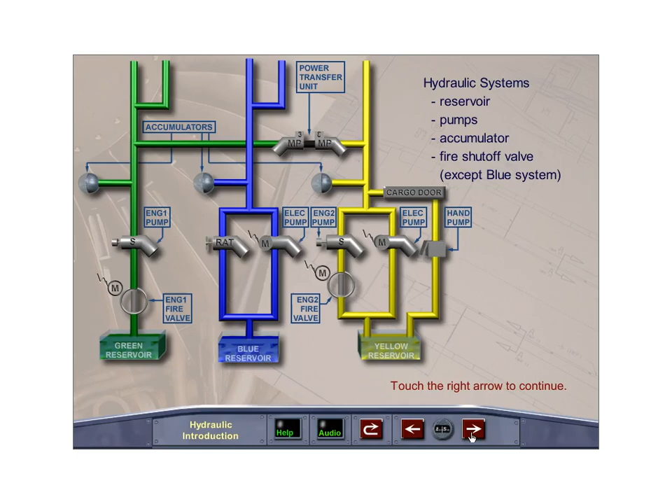The hydraulic system consists of three independent continuously operating systems: green, blue, and yellow. Each system has its own reservoir, pump or pumps, and accumulator. The green and yellow systems each have a fire shutoff valve. Hydraulic fluid cannot be transferred from one system to another. The normal system operating pressure is 3,000 psi.

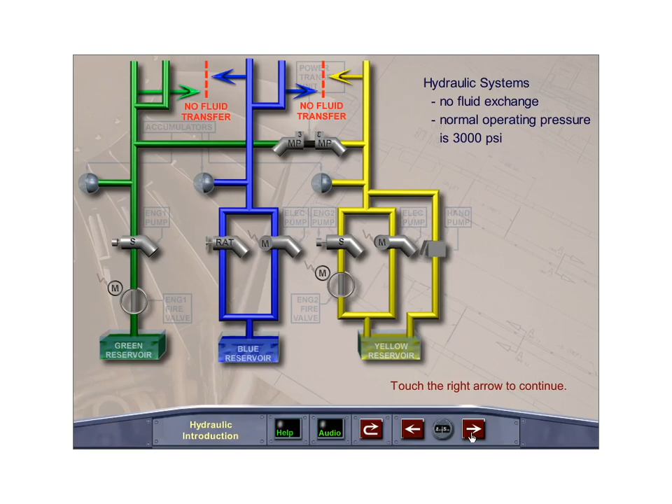The hydraulic control panel is located on the overhead panel. There are switches for the green, blue, and yellow systems. In normal operating configuration, there are no lights illuminated on the hydraulic panel.

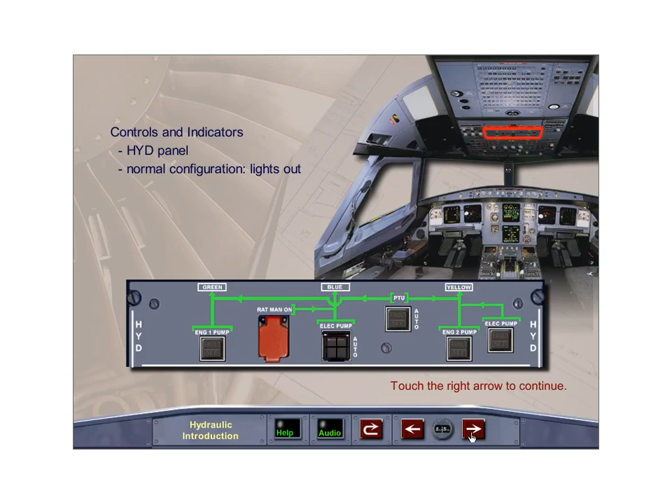Additional hydraulic push-button switches can be found on the maintenance panel. They are used only for maintenance purposes.

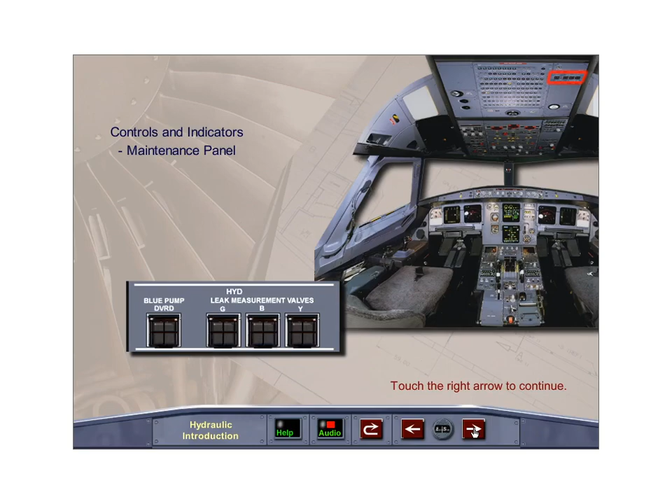The ECAM hydraulic page will be displayed automatically with any hydraulic system fault, or by pressing the hydraulic push-button switch on the ECAM control panel.

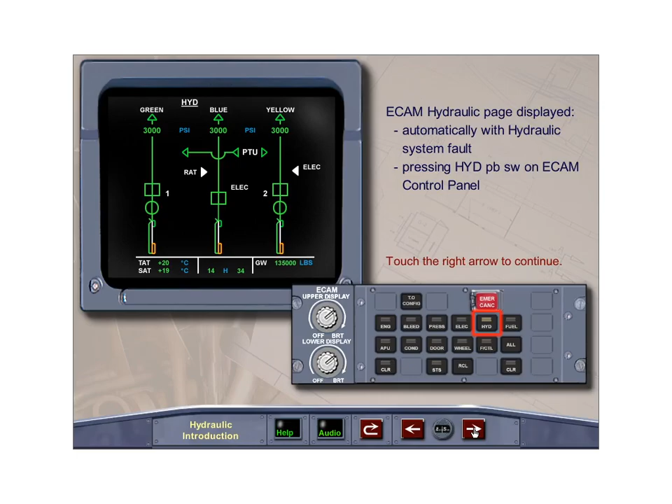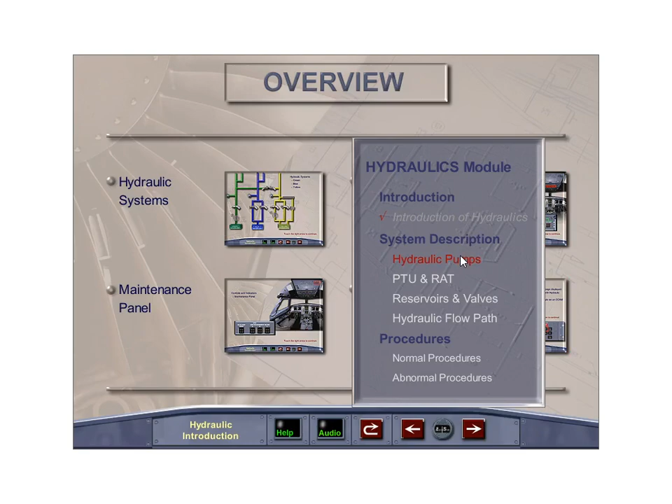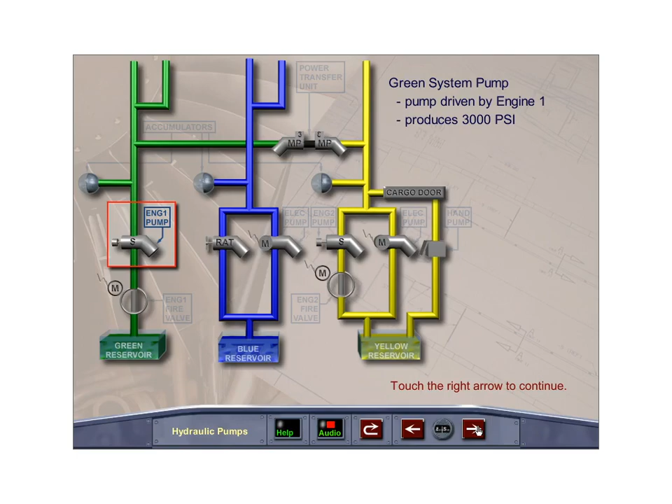A pump driven by engine 1 pressurizes the green system to a normal pressure of 3,000 pounds per square inch. An electric pump pressurizes the blue system to a normal pressure of 3,000 pounds per square inch. In case of emergency, a pump driven by the ram air turbine will pressurize the blue system to a pressure of 2,500 pounds per square inch.

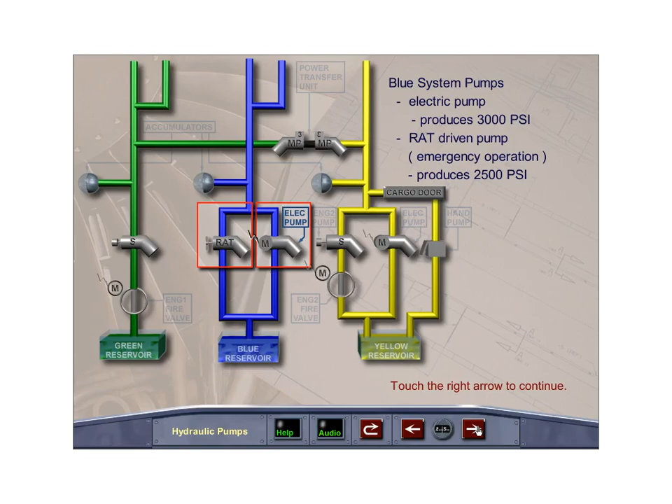A pump driven by engine 2 pressurizes the yellow system to a normal pressure of 3,000 pounds per square inch. On the ground, with the engine stopped, or in flight as a backup pump, the electric pump can pressurize the yellow system to a pressure of 3,000 psi. On the ground, with electric power not available, a hand pump can be used to pressurize the system.

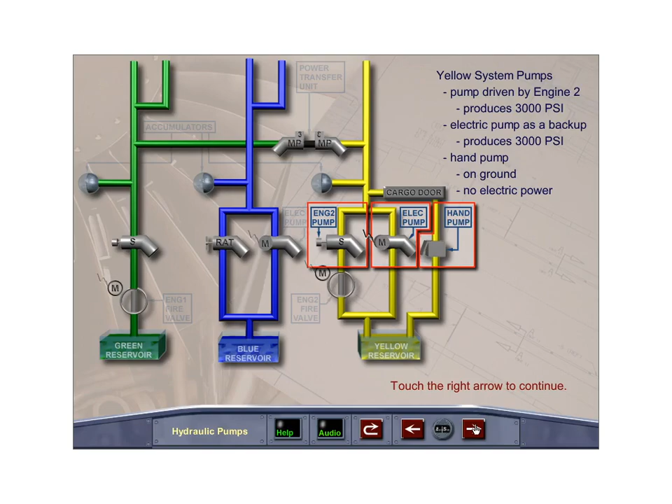The engine 1 and 2 pump push-button switches for the green and yellow hydraulic systems are located on the overhead hydraulic panel. When the engine is running and the switch is in the on or light out position, the pumps pressurize their respective hydraulic systems.

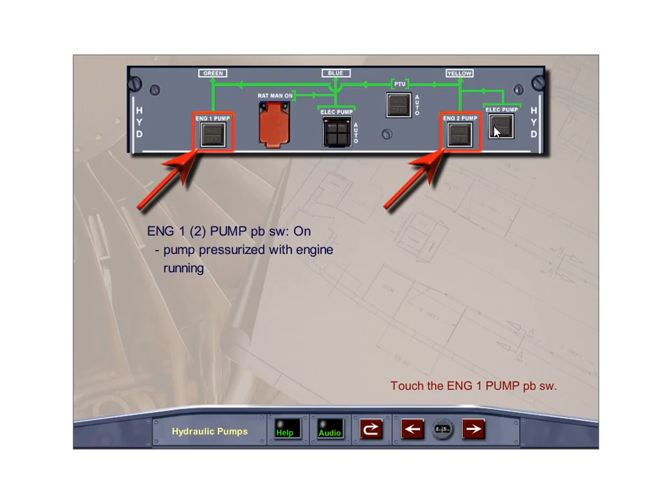Touch the engine 1 pump push-button switch to turn it off. When the engine pump push-button switch is pushed off, the pump is depressurized and the generation of hydraulic power stops.

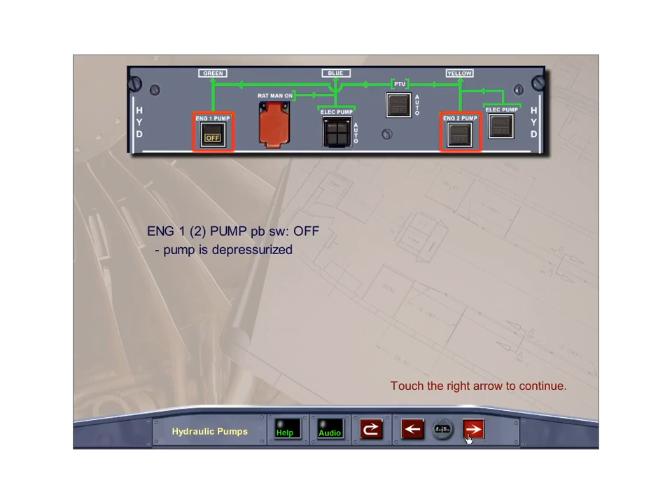The amber fault light illuminates if the reservoir level is low, the reservoir overheats, the reservoir air pressure is low, or the pump pressure is low. The fault light for pump low pressure is inhibited on the ground with the engines not running, to prevent nuisance warnings.

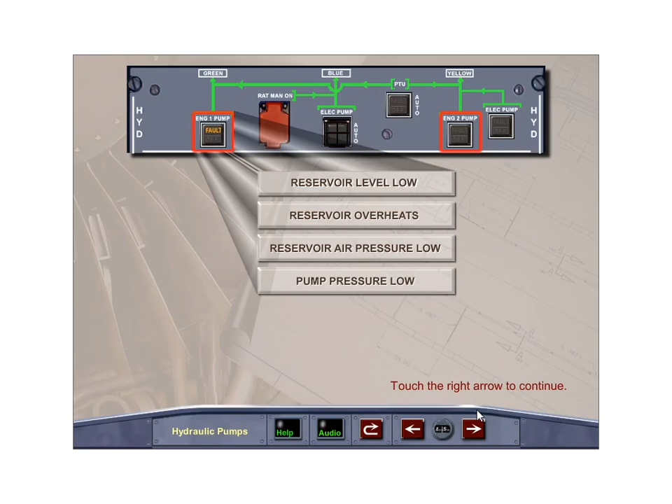With the engine 1 or 2 pump push-button switch indicating fault and the switch selected off, the fault light will go out, except for reservoir overheat, where the light will show fault as long as the reservoir overheat exists.

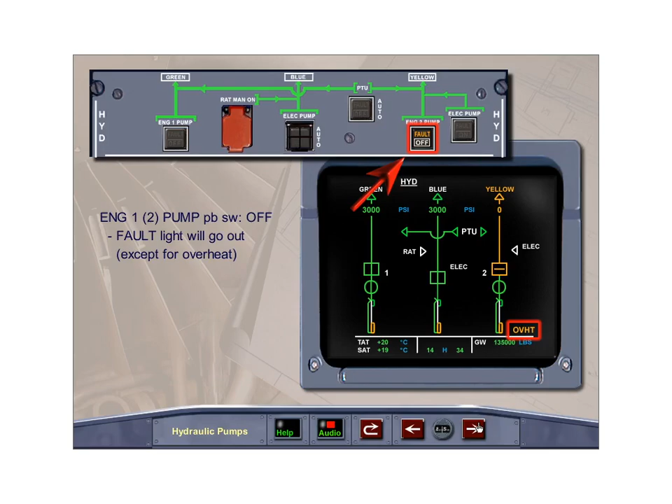The guarded blue electric pump push-button switch is normally in its auto, lights out position. On the ground, with one engine running and AC power available, the electric pump will operate. In flight with AC power available, the blue electric pump will operate if the engines are running or shut down.

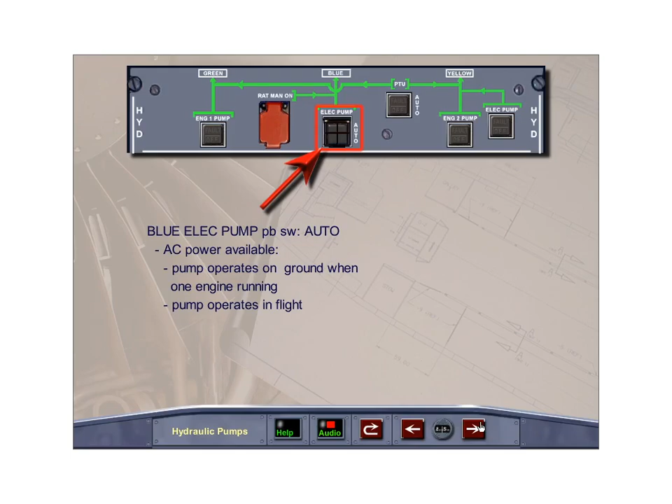Touch the blue electric pump push-button switch to turn it off. The pump is de-energized when the blue electric pump push-button switch is selected off.

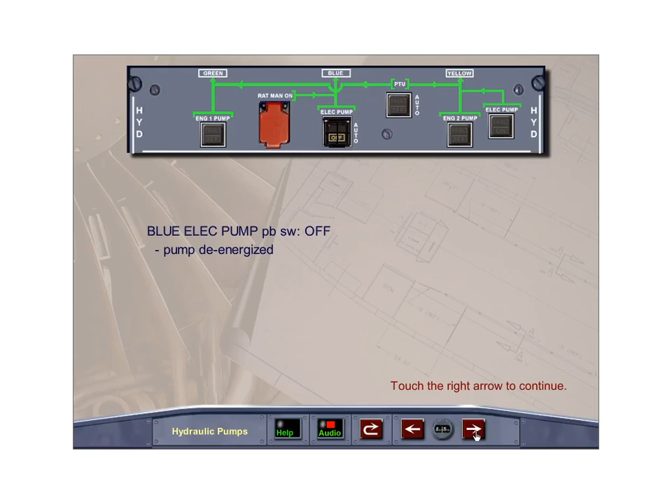The blue electric pump push-button switch fault light will illuminate if the blue reservoir level is low, the reservoir overheats, the reservoir air pressure is low, the pump pressure is low, or the pump overheats. The pump low pressure fault is inhibited on the ground when the engines are stopped.

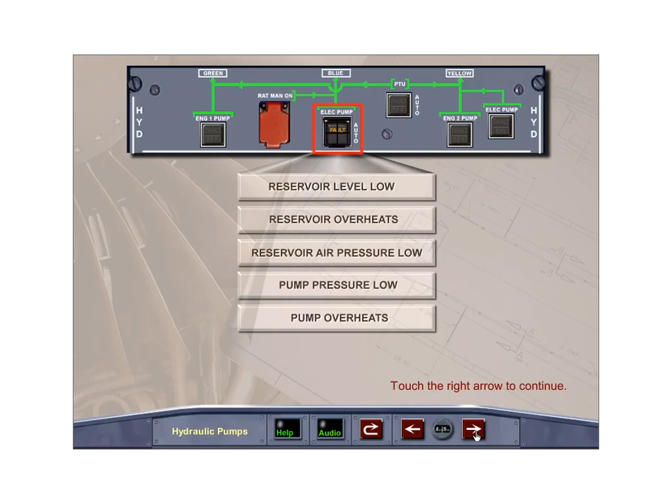The fault light will go off when the blue electric pump push-button switch is selected off, except for a reservoir or pump overheat, where the fault light will remain illuminated as long as the overheat condition exists.

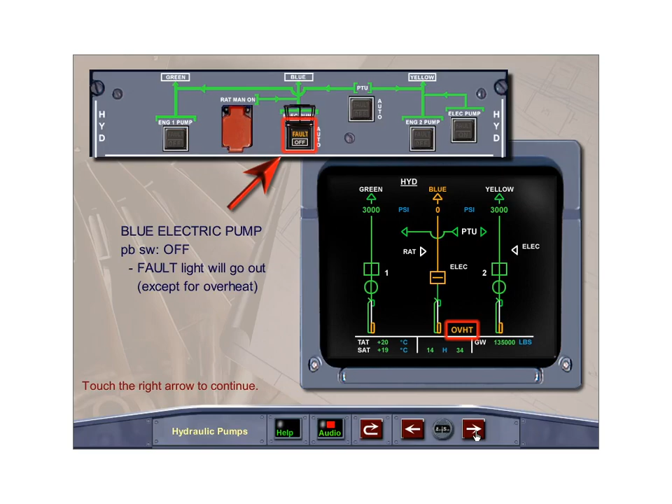Normally, the spring-loaded yellow electric pump push-button switch is in its off, light-out position. With the pump selected off, the pump is de-energized.

However, when a cargo door lever is set to open or close, the yellow electric pump comes on automatically. The yellow electric on light does not illuminate, and the operation of flight controls is inhibited.

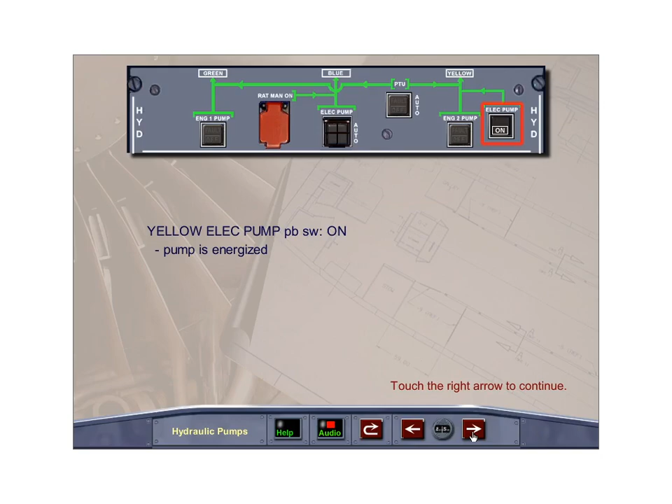The pump is energized when the yellow electric pump push-button switch is selected on. The yellow electric pump push-button switch fault light will illuminate, and ECAM caution will be displayed, if the yellow reservoir level is low, the reservoir air pressure is low, the reservoir overheats, the pump pressure is low, or the pump overheats.

The fault light will go off when the yellow electric pump push-button switch is selected off, except for a reservoir or pump overheat, where the fault light will remain illuminated as long as the overheat condition exists.

Hydraulic system information is displayed on the ECAM hydraulic page. A green inline indicates the associated push-button switch for the pump is on and hydraulic pressure is normal.

Hydraulic system information is displayed on the ECAM hydraulic page. A green inline indicates the associated push-button switch for the pump is on and hydraulic pressure is normal. An amber cross line indicates the associated pump is off. An amber low indicates the push-button switch is on, but hydraulic pressure is low.

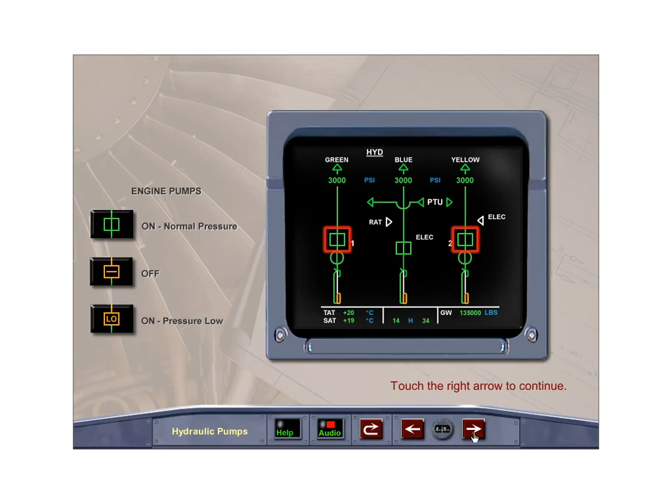A green inline indicates the blue electric pump is on and hydraulic pressure is normal. An amber cross line indicates the blue electric pump is off. An amber low indicates the pump is on, but hydraulic pressure is low.

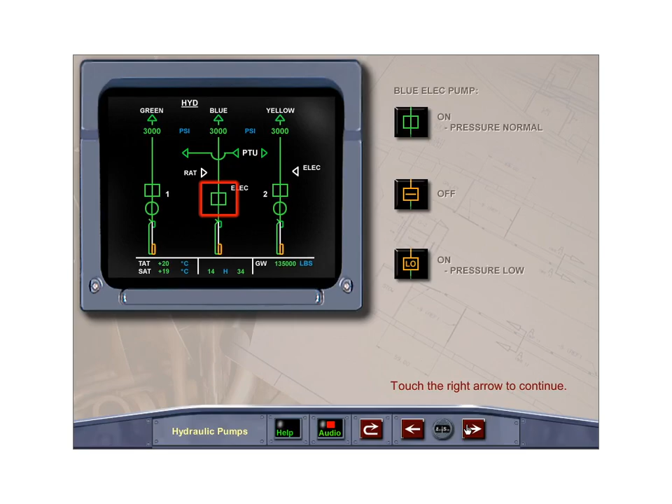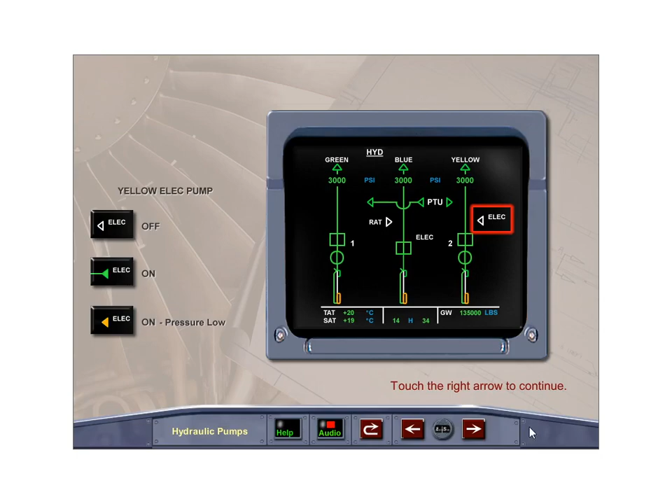The yellow electric pump control symbol is normally white, indicating the electric pump is off. It appears green when the electric pump is on, and amber when the electric pump is on but the yellow system has low pressure.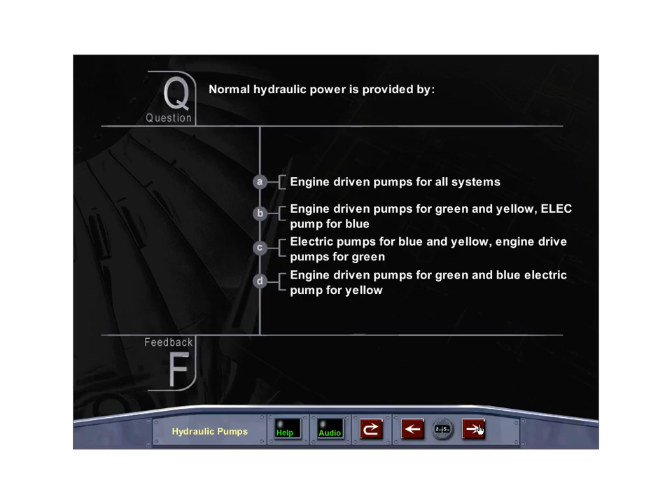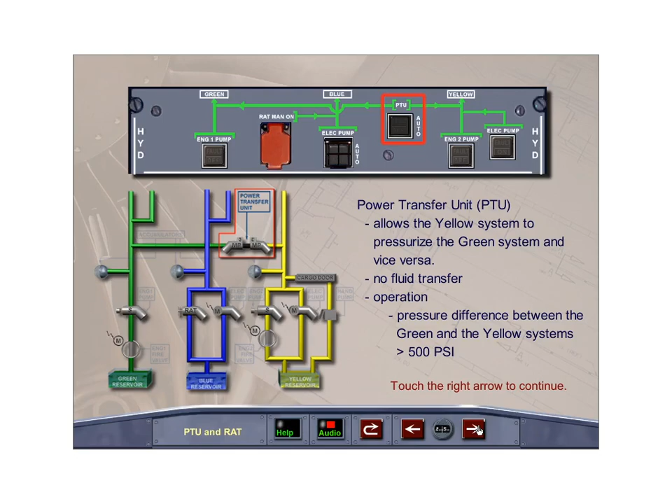The PTU is a bidirectional power transfer unit that allows the yellow system to pressurize the green system and vice versa without fluid transfer. The PTU push-button switch is located on the hydraulic panel. It is normally in its auto or light-out position. The PTU operates automatically when the pressure difference between the green and yellow systems is greater than 500 psi.

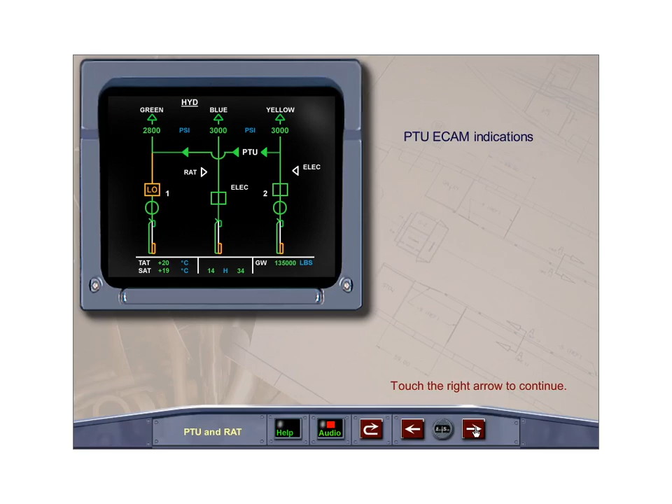When the power transfer unit is operating, its indications are displayed on the ECAM hydraulic page. The PTU is disarmed with the push-button switch in the off position, or if the PTU was operating, hydraulic power transfer stops.

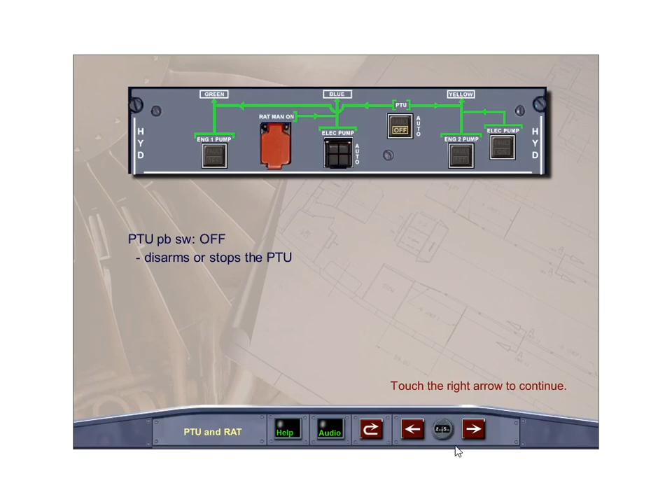The PTU push-button switch amber fault light, accompanied by an ECAM caution, illuminates if the green or yellow reservoir level is low, air pressure is low, or overheats. The fault light goes out when the PTU push-button switch is selected off, except for a reservoir overheat, where the fault light remains illuminated as long as the overheat condition exists.

With the PTU push-button switch indicating fault and the switch selected off, the fault light will go out, except for reservoir overheat, where the light will show fault as long as the reservoir overheat exists.

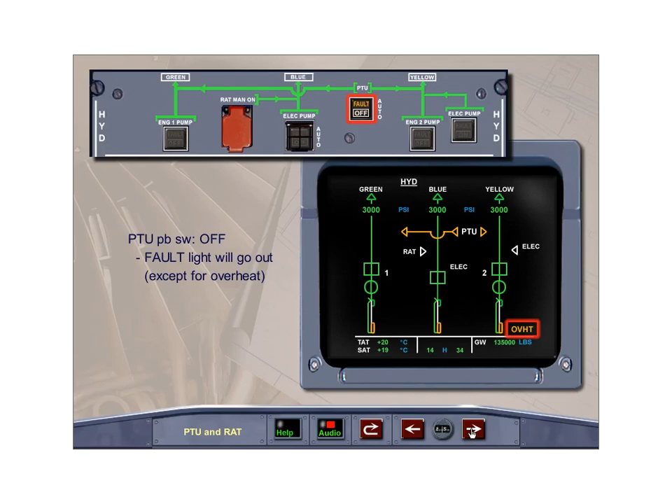There are 4 PTU indications on the hydraulic ECAM display. Open green arrows indicate that the PTU push-button switch is in the auto position and the PTU is not transferring pressure. Open amber arrows indicate the PTU push-button switch is selected off.

When the PTU is operating, solid green arrows to the left indicate the yellow system is powering the green system, and solid green arrows to the right indicate the green system is powering the yellow system.

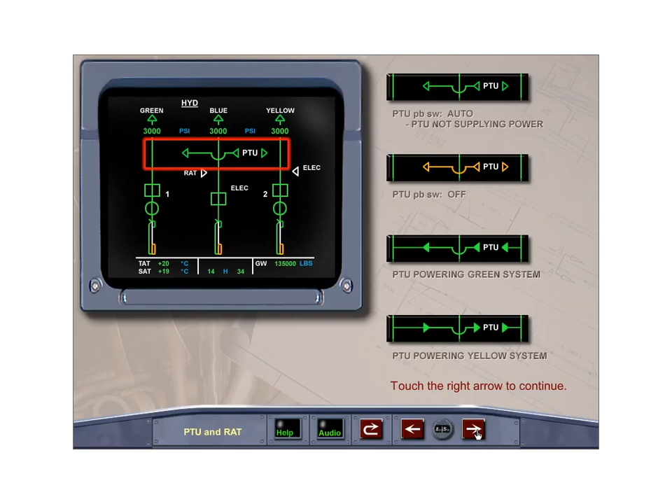The PTU is inhibited during the first engine start and automatically tested during the second engine start.

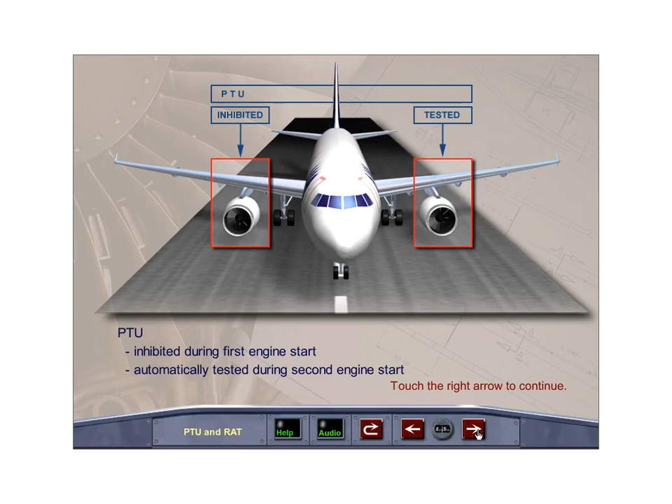A dropout ram air turbine, or RAT, coupled to the hydraulic pump provides backup hydraulic pressure for the blue system. The RAT deploys automatically if both AC bus 1 and 2 are lost or both engines fail. It can be stowed only on the ground.

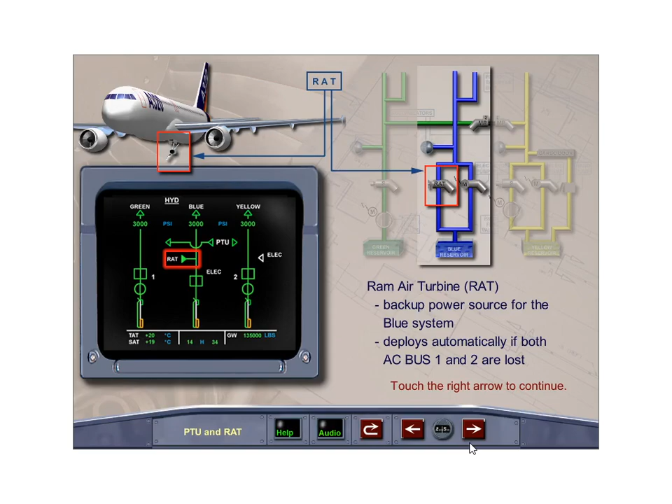The guarded RAT manual on push button is located on the hydraulic panel. Pressing the RAT manual on push button manually deploys the RAT.

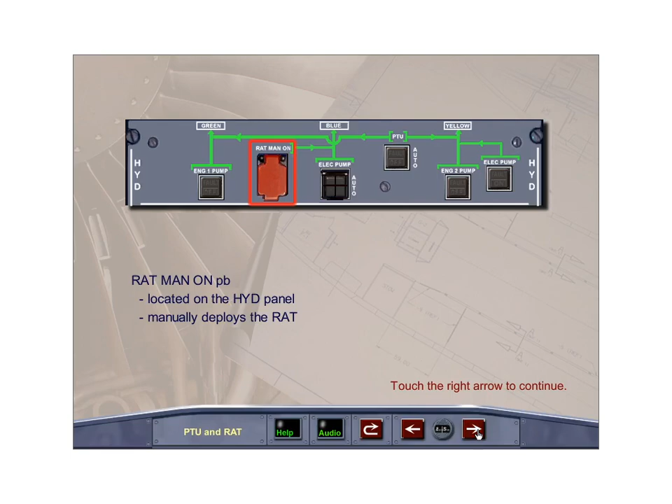There are 3 ECAM RAT indications. The white open triangle indicates the RAT is stowed. The green solid triangle indicates the RAT is deployed and operating. The amber solid triangle indicates the RAT pump has a fault and is not available.

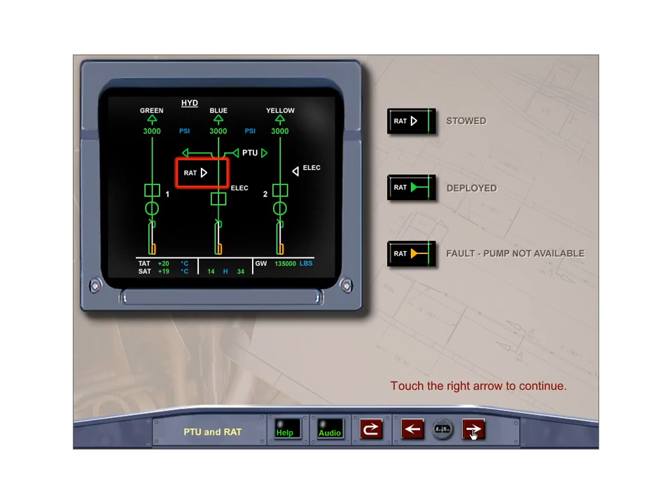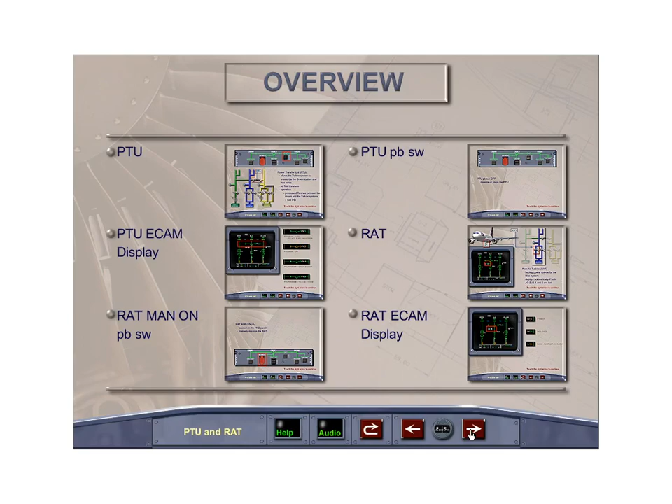Each hydraulic system is supplied by its own hydraulic reservoir, which is pressurized by pneumatic air pressure to prevent hydraulic pump cavitation. Hydraulic fluid cannot be interchanged between systems.

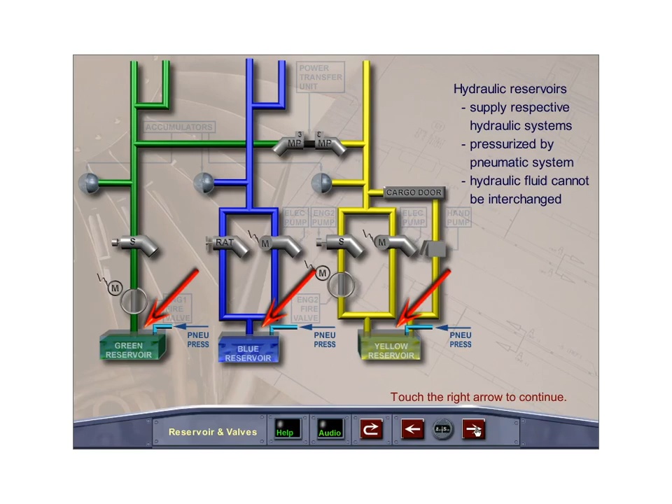The ECAM reservoir quantity indication is normally green. It becomes amber when the fluid level falls below the warning level.

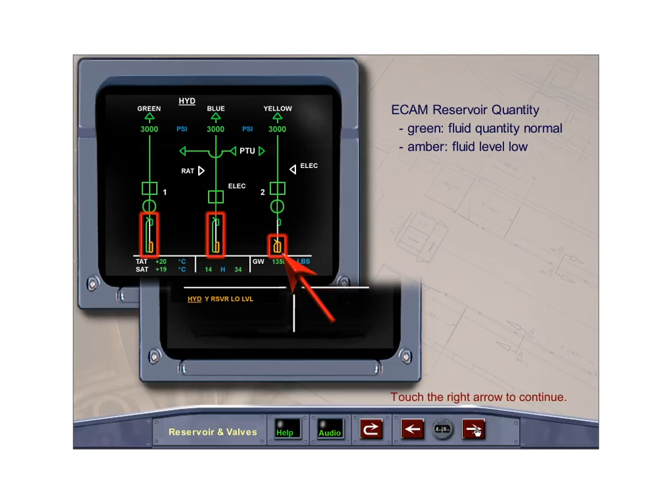In case of an engine fire, the green and yellow systems each have a fire shut-off valve to cut off hydraulic fluid to the respective engine-driven pump.

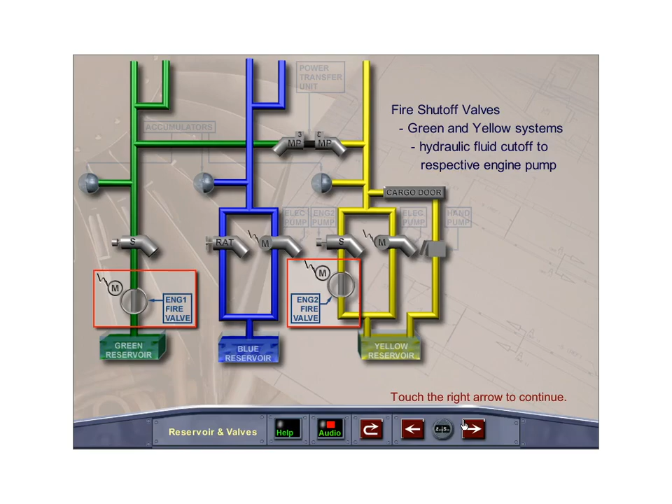The fire shut-off valves can be closed by pushing the engine 1 or 2 fire push-button switch on the overhead fire panel.

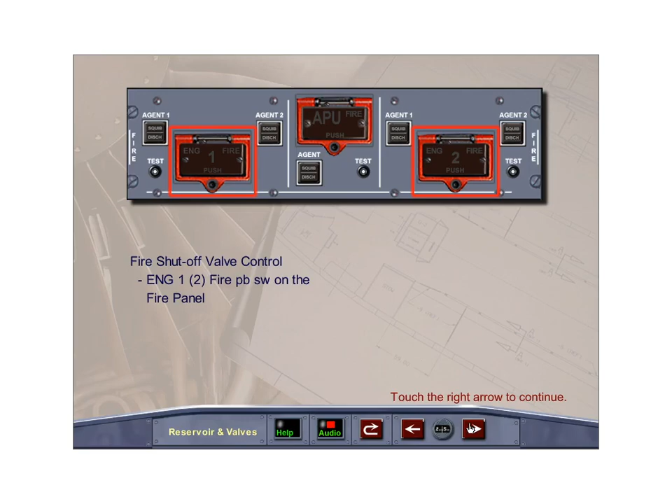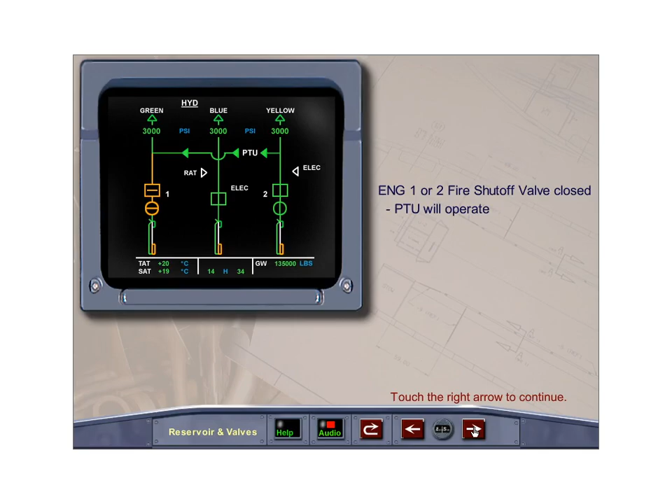If the engine 1 or 2 fire shut-off valve is closed, the PTU will operate to provide sufficient hydraulic pressure. The ECAM fire shutoff valve indication is displayed cross-line amber if the valve is fully closed. It is displayed in line green if the valve is not fully closed.

There is one accumulator in each hydraulic system, which assists in maintaining a constant pressure during normal operation. There are no associated cockpit indications.

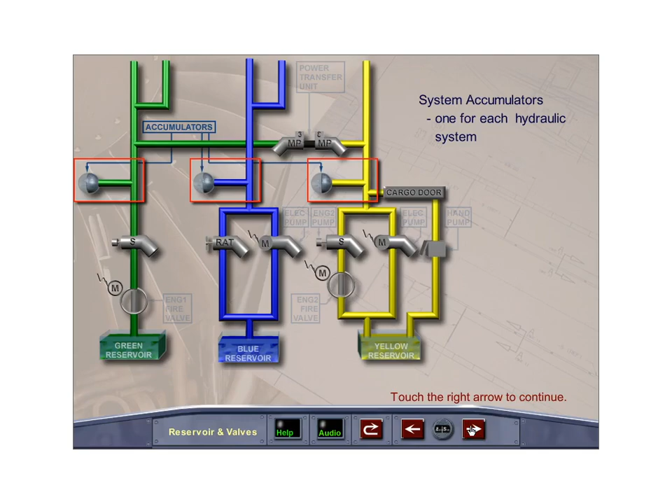Each hydraulic system has a leak measurement valve, which measures the leakage in the circuit. The leak measurement valve push-button switches located on the overhead panel are for maintenance use only.

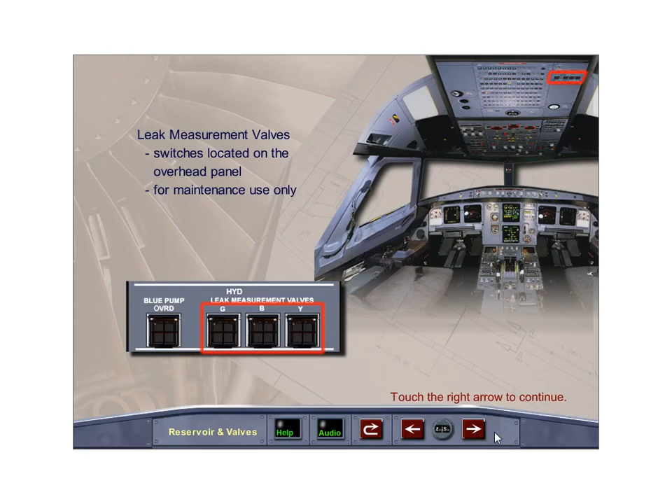The green and yellow systems each have load alleviation function accumulators, or LAFs, which maintain the required system pressure during rapid aileron and spoiler operation caused by turbulence. Complete coverage of the load alleviation function is contained in the flight control module.

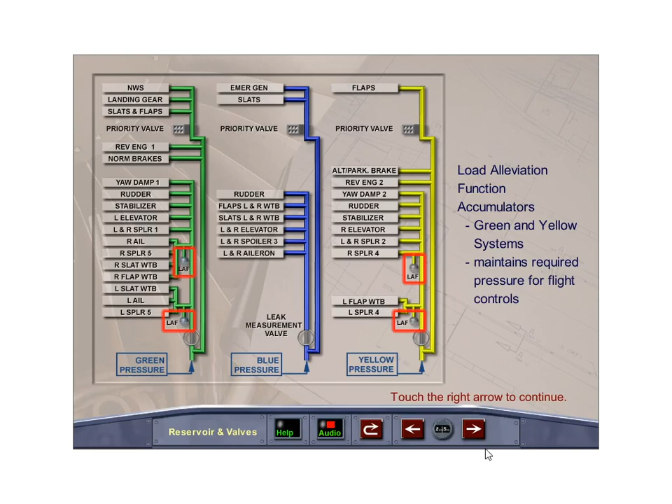Each hydraulic system has a priority valve. If system pressure is low, the priority valve will cut off hydraulic pressure to high load users, such as nose wheel steering, the slats and flaps, and the landing gear, to maintain the operation of the essential flight controls.

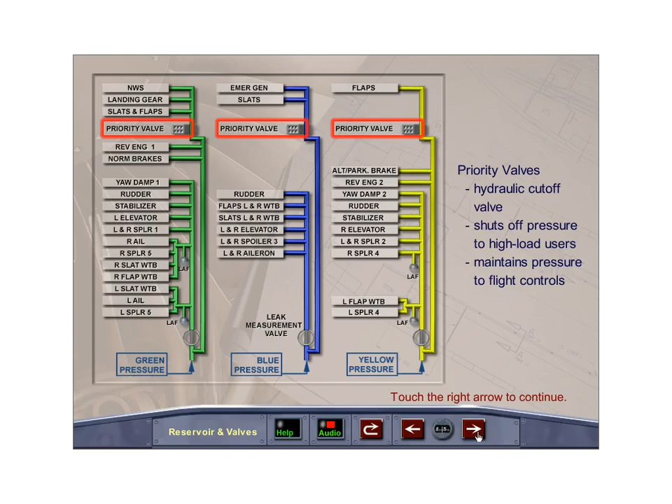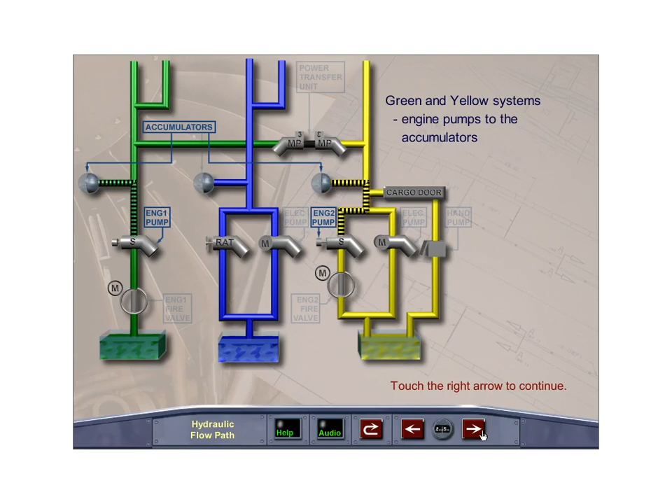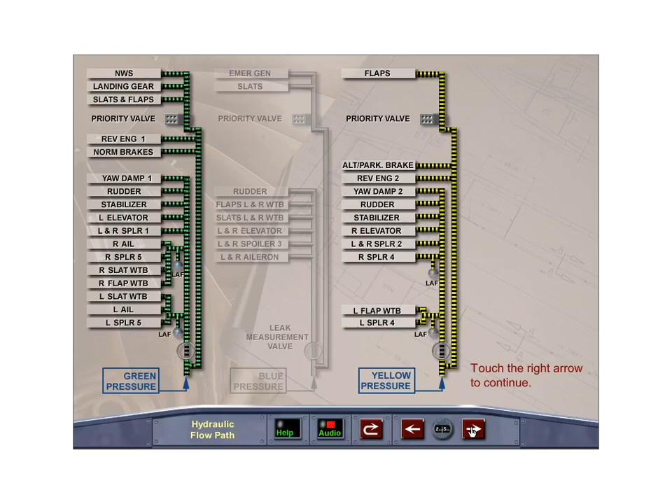In the green and yellow systems, the fluid flows from the reservoirs to the engine pumps through the fire valves. From the engine pumps, hydraulic fluid flows to the accumulators. From the accumulators, the fluid flows to the hydraulically operated system components, and then back to the reservoirs via the return manifold. In the blue system, the hydraulic fluid flows from the reservoir to the electric pump or the ram air turbine if it is extended.

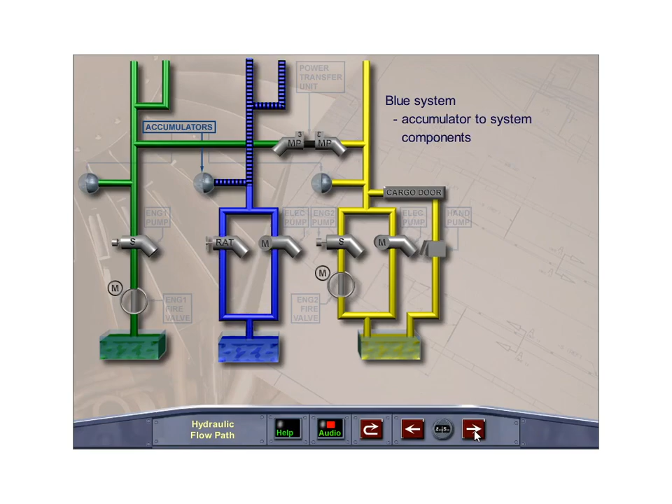Then it flows to the accumulator. From the accumulator, the fluid flows to the hydraulically operated system components and then back to the reservoir.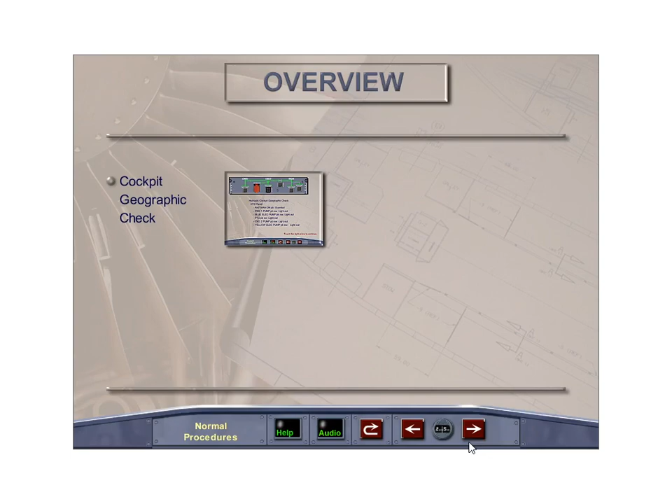When the green pump output pressure falls below 1,750 pounds per square inch, the hydraulic green engine pump low pressure fault is triggered. A single chime sounds, master caution, ECAM hydraulic page, and the engine 1 pump push button switch fault light will be displayed.

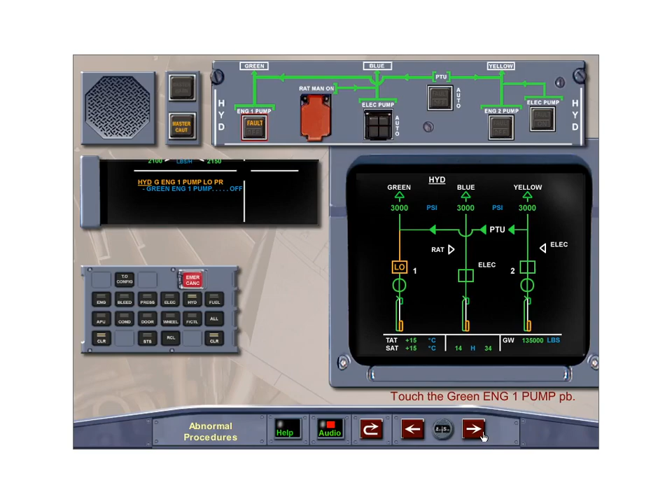When the green hydraulic pressure is 500 psi less than the yellow system, the PTU, if operative, will transfer hydraulic power to the green system to maintain 3,000 psi. The ECAM action is to select the green engine 1 pump off. Touch the green engine 1 pump to select it off.

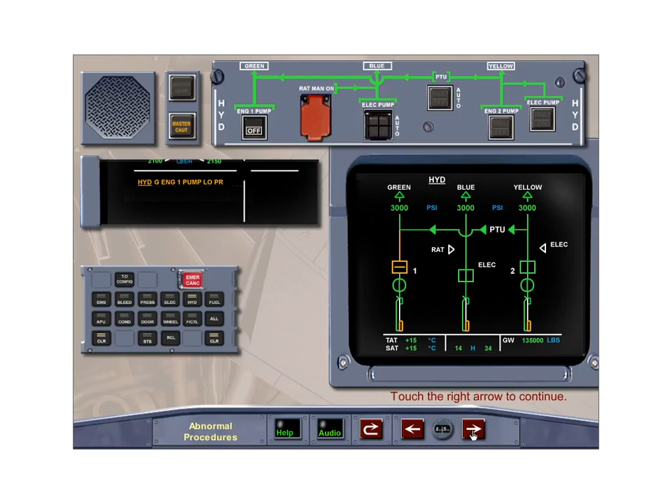With the engine 1 pump turned off, the ECAM hydraulic page will display the pump cross line amber with the PTU powering the green system. Touch the right arrow to continue.

If the blue electric pump overheats, the hydraulic blue electric pump overheat fault is displayed. The ECAM action in this case is to select the blue electric pump off. Touch the blue electric pump push button switch to select it off.

With the blue electric pump selected off, there will be no hydraulic pressure to the blue system as indicated on the ECAM hydraulic page. The upper ECAM will now display B system low pressure as a boxed primary failure and flight controls on the right side as a secondary failure.

The secondary flight controls failure is displayed because some spoilers have no hydraulic pressure and some flight controls are only powered by one hydraulic system.

Pressing the clear push button switch on the ECAM control panel, the flight control page now displays the flight controls which are affected by the loss of the blue system.

As can be seen by the amber indications, the number 3 spoiler is the only flight control without hydraulic pressure. The other flight controls have at least one other source of hydraulic pressure. Clear flight controls by pressing the clear push button switch on the ECAM control panel.

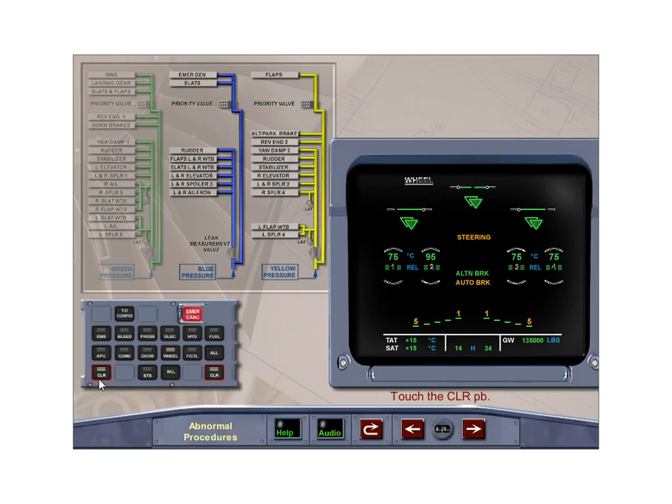The status page lists the inoperative systems on the right-hand side. ECAM approach procedures require the landing gear be extended by the gravity extend procedure, as there will be no hydraulic pressure to the landing gear. Landing distance is increased by 10% due to spoilers 1 and 5 being inoperative. Slat and flap operation will be slow as they are only pressurized by one hydraulic system. Complete coverage of the affected systems will be covered in related modules. Touch the right arrow to continue.

If hydraulic reservoir air pressure is low, the hydraulic reservoir low air pressure caution is displayed. Since there is the possibility of hydraulic pump cavitation, and if the hydraulic pressure is fluctuating, the ECAM actions are to turn off the PTU and the yellow engine 2 pump. Touch the PTU push button switch, then touch the engine 2 pump push button switch to complete the ECAM actions. Touch the right arrow to continue.

With the ECAM actions complete, the independent failure of hydraulic yellow engine 2 pump low pressure and a primary failure of yellow system low pressure are displayed. The right side of the ECAM displays flight controls as a secondary failure as they are affected by the loss of the yellow system. Clear hydraulics and display the flight control page by pressing the clear push button switch on the ECAM control panel.

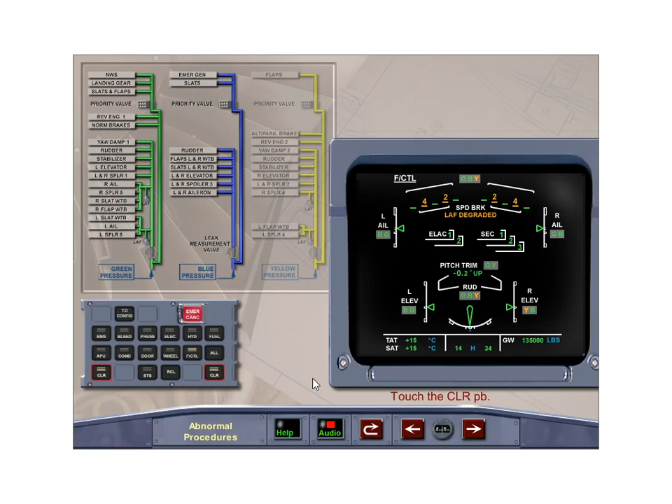The flight control page displays spoilers number 2 and 4 as inoperative. The rudder and right elevator are also affected with the yellow system inoperative. Clear flight controls and display the status page by pressing the clear push button switch on the ECAM control panel.

The status page displays the inoperative systems on the right with the approach procedure on the left. With the aircraft at a lower altitude, there is a possibility of sufficient air pressure to the reservoir. The yellow engine 2 pump and PTU are returned to their normal positions to try and restore the yellow system. If the system is not recovered, landing distance is increased by 10% due to the loss of spoilers 2 and 4. Flaps will be slow due to only one hydraulic system supplying pressure. Touch the right arrow to continue.

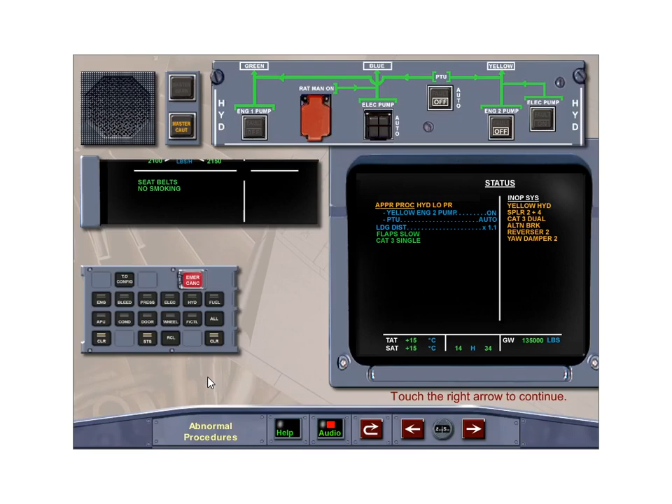A reservoir overheat will trigger the related system overheat fault. As displayed now for the yellow reservoir overheat, the ECAM actions are to turn off the PTU and yellow engine 2 pump. Touch the PTU push button switch and the yellow engine 2 pump to complete the ECAM action. Touch the right arrow to continue.

With the PTU and engine 2 pumps selected off, the yellow system will be depressurized. The PTU and engine 2 push button switches will indicate fault as long as the reservoir overheat lasts. Touch the right arrow to continue.

At this time, dual hydraulic failures will be discussed. Due to the variables involved in dual hydraulic failures, only the initial warnings, indications, and systems affected will be covered. Complete coverage of dual hydraulic failures will be demonstrated in simulator lessons. Referring back to the hydraulic green reservoir low-level fault, the green system was inoperative with the PTU and engine 1 hydraulic pump selected off.

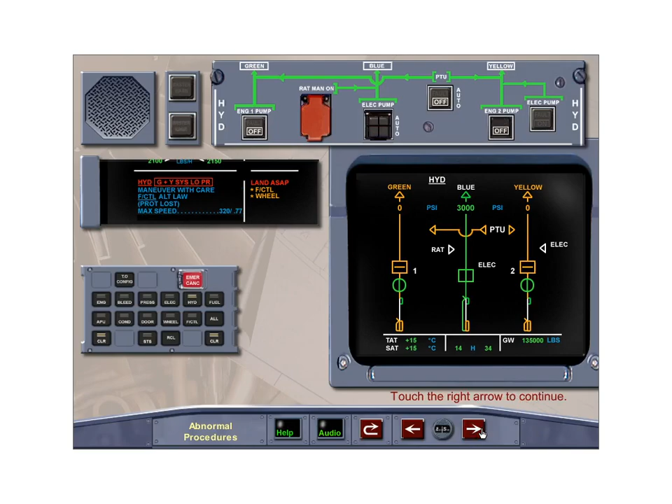A review of the ECAM status page will display the inoperative systems. During the approach, the ECAM will require that the landing gear be extended by gravity due to no hydraulic pressure to the landing gear. Approach speed is increased due to the flaps not being extended, and landing distance is increased due to partial ground spoilers. Braking will be by accumulator pressure only, and slats will be slow as they are only pressurized by one hydraulic system.

If the dual hydraulic failure was a green and blue low-pressure fault, a review of the ECAM status page will display the inoperative systems. During the approach, the ECAM will require that the landing gear be extended by gravity due to no hydraulic pressure to the landing gear. Approach speed is increased due to the slats being inoperative, and landing distance is increased due to partial ground spoilers. Flaps will be slow as they are only being pressurized by one hydraulic system.

The remaining dual hydraulic failure is the hydraulic blue and yellow low-pressure fault. Selecting the ECAM status page will display the inoperative systems. During the approach, the ECAM will require that the landing gear be extended by gravity to preserve the pressure of the green system. Landing distance is increased due to partial ground spoilers. Flaps and slats will be slow as they are only being pressurized by one hydraulic system.